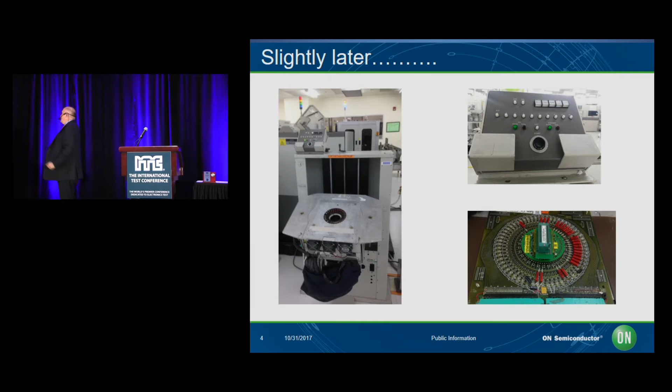And there was a little box like that that had two green lights: functional test, DC test. And your primary goal, or frankly your only goal as a test engineer, was to get those two green lights to come on. And so, once you got those green lights, the parts went away. And I think that in today's world, once you get those green lights, that's when the real analysis of what happened in that test and what you can do with that data begins. And so while we had sort of the dark ages there, we have a real opportunity now going forward.

But there are a lot of challenges that face test development engineers and test engineers today. We didn't imagine then the responsibility of developing a part and testing it and certifying it good for something like autonomous driving. A vehicle that was going to drive us, the closest possible thing maybe then was the moon launch rockets, where you could test one part for 6 weeks and make sure it was suitable for the purpose, unlike today where you have to test a billion parts a week and make sure that they're at that quality level.

Functional safety. Vehicles or other machines around us are going to make decisions on personal and human safety. It has to be validated. Digital medicine. A lot of the products that we build today are either implantable or in products that are helping people make decisions about their health. Again, those decisions are happening at a high enough value and a high enough volume level that we can't do the things that we used to do, which were really convenient, just test, maybe burn-in and some other things. And then what I call digital dependency.

Even the products that we used to consider consumer electronics, I can tell you people don't consider that anymore in their world. If your cell phone isn't working and you're using it as your GPS, or in any number of other areas. There have been studies where people's blood pressure actually goes up if their cell phone runs out of battery. And we're dependent on these electronic items nowadays. Even if they're products where we used to consider that a 300 or 400 ppm type of problem would be okay, it's not okay anymore because it's the world that we live in. We depend on these things.

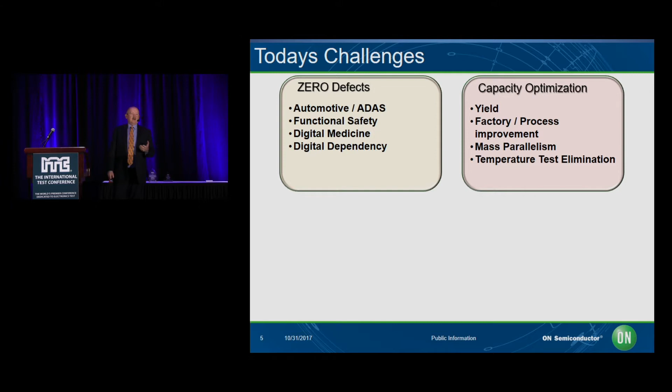I think we've sort of used temperature testing as, I won't say a crutch, but a bit of a crutch in validating how we do products. And I believe we have the information to eliminate that in a lot of cases today.

Design methodology validation, I think that we've been doing that for a long time. Some of the papers that I saw were on this, but closing the loop between our simulation and device models, getting them back into the actual data that we're taking from our testers, figure of merit optimization for our products, and being able to make decisions on how we want to specify the products based upon the actual output and the data, whether or not they're going to be suitable for the purpose that we want them to be.

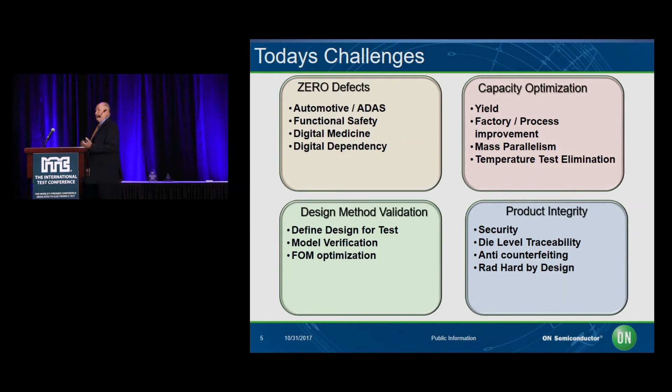And then product integrity. And product integrity, I think, is very different than zero defects, because this means that the product is the product. There's a lot of work going on right now in security and being able to make sure that the products are secure and unhackable. I saw that there's some papers on that this week. I think a big piece of that can happen in the test community, while we have those devices under test. Die-level traceability is giving us the opportunity to really understand the data that we have.

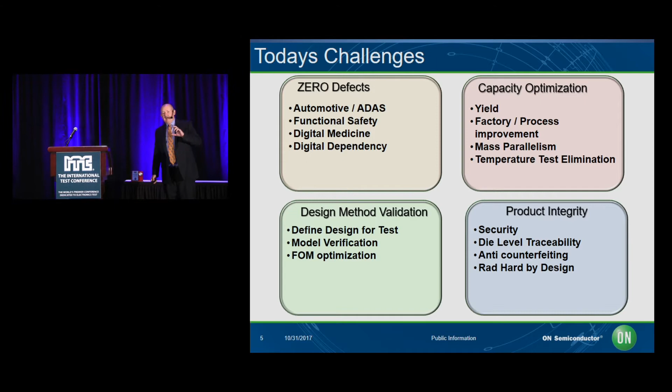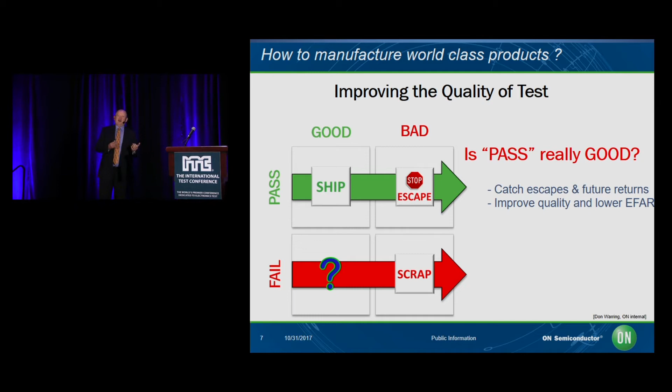So we've got good parts, bad parts. Is a pass really good? Sometimes that's a question. Is the one that fails really bad? One of the examples of this from my very earliest days is we had done an analog ASIC, a custom part that was going into typewriters. And we could not mimic whatever noise situation was being created in the typewriter in the ATE environment. We tested and tested, and after months of work, we still got parts that didn't work in the typewriter that worked on the ATE.

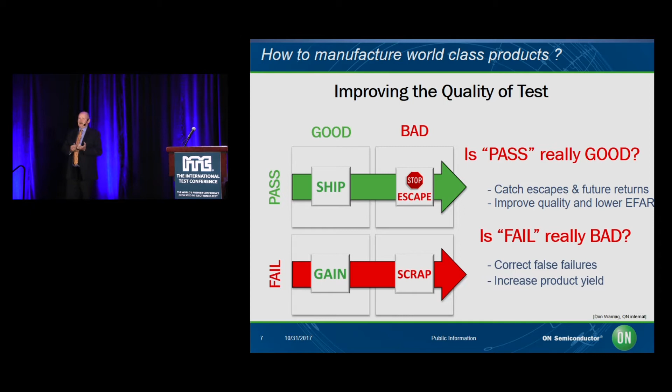And we literally had a person sitting in front of a typewriter with a ZIF socket and a handler, and she would push good or bad after she typed 2 words. We can't do that in today's environment with the volumes in the products that we have. And the other thing is, are we throwing away a lot of parts that are suitable for the purpose, and is that creating yield problems?

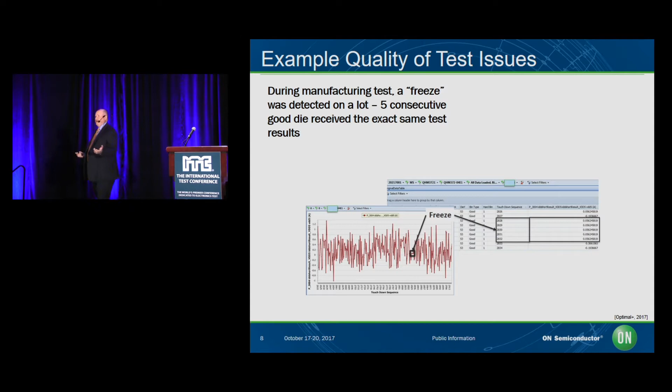But what about big data and being able to make decisions on data beyond setting up simple rules as we evaluate our products? There's a lot of discussion about all the things that we can do with the cloud and all the information that can be stored and gathered, and the amount of data being taken all the time now. My understanding is that on one of the new jet turbine engines, there's about 1 terabyte of data taken every 20 minutes. Well, that's great, but what happens to 1 terabyte of data every 20 minutes in operation?

Are we really evaluating that data, making the kind of decisions on it? The information is all there. Are we really looking at all of the information? And we have the same thing in our world in test. We've got information from the fab. We've got information from the device under test.

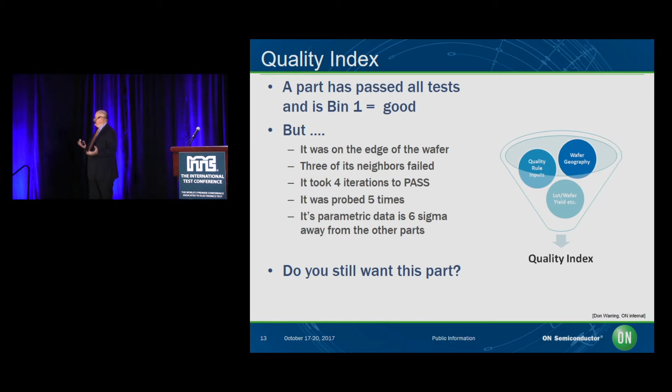So what's the quality index of a part? Is a good part the one where the lights come on green, right? Well, yes, sometimes, but we got it. But was it on the edge of a wafer? Is that the part that we really want? How were the parts around it? Was it a good guy in a bad neighborhood? Has it been probed multiple times? Did it take 2 or 3 insertions to pass? What do we know about the part, and how good is good?

Good guy in a bad neighborhood. Maybe you do or don't want to eat that strawberry. There's a strawberry in there. It doesn't have any problems at all, but if you look at the strawberries around it, you might think, this might not be one that I want to eat or that I want to feed to my children.

And yet we have that situation sometimes on a wafer as we're doing probe. We'll sit there and there'll be 4 or 5 bad die and a good die in the middle. You can see a couple of examples on there where you say, gee, is that really a die that I want to send to my customer? Is there something that's going on this wafer in particular, something that happened here that I should know more about?

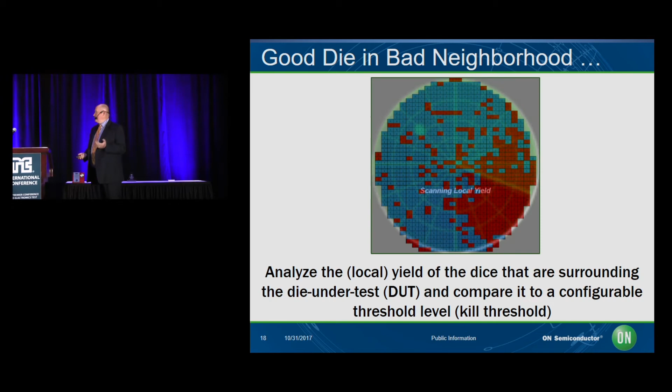Well, one of the things that we look at is, okay, how do we decide whether we've got a bad neighborhood? But again, all of this analysis is post-processed. After the bad guys have been inked, you go back and you can step across each of the die and you can say, how good is this die and how good are the die that are around this die? And this is all, again, just mathematical post-processing. You can go in and you'll get a different index or a different wellness factor for the die based upon the die that are around it.

And here you probably can't read those from where you are, but there are a bunch of small sub-1 numbers for any of the die that could possibly be around a bad neighborhood based upon something that we call a kill threshold. And that says, what die do I not want to give to my customer, or do I not think is suitable for this purpose? And it's a pretty simple equation. There's die area and the sensitivity factor.

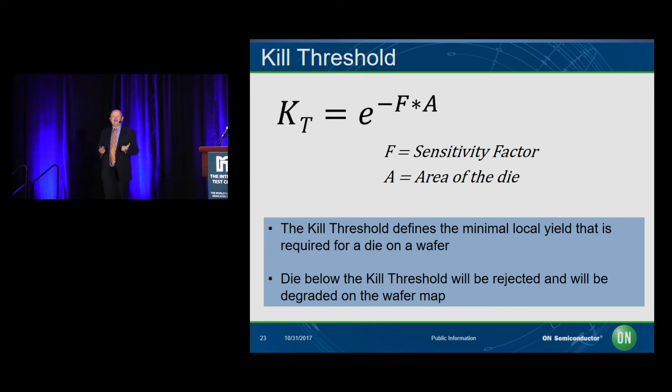And the question about a sensitivity factor is, how sensitive are you to having a part that is in a bad neighborhood? So here we say, okay, there's a sensitivity factor of 10. This would cause us to ink out or to post-ink out those 5 or 6 red die or yellow die that are there in the heart of the bad neighborhood. And again, this was an example that we built. In reality, this whole wafer would likely be thrown away because of that yield pattern. But it was a really good demonstrator for what the power of this tool is.

If you move the sensitivity down to a 9 in that formula, you can see now we've got about a 1% dropout. We throw away a few more yellow die there. You can move down again. Now we're a little over a 1% dropout. But as you continue to decrease this sensitivity factor, you step across, you begin to throw away a few more. Now we're up to 13% die. Do we think that that's gotten all the bad ones? We can continue all the way till there are only a handful of good die, depending upon that factor that we put in there for that kill ratio.

This may be important, and it may not be a decision that you make right now. This may be a decision based upon e-test information, mechanical information that's come out of the fab. There are a number of other things that may help you set this sensitivity level. Maybe what are we going to put this in? Are we going to put this in the guidance system of the new A350 or the flight controller, or are we going to put this into a power bank that people are going to give away as a gift at the show?

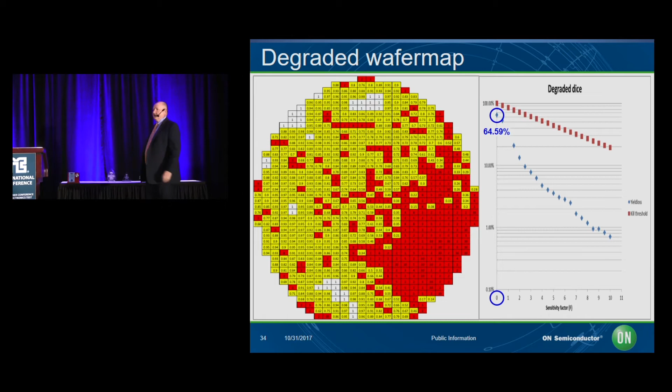And so I think there's a lot of data, but this is all post-processing. So this can be made based upon other big data that you pull into the system. Like I say, how close was this to the edge of the e-test data? How many times did we have to go through temperature in order to do this? And so you can sort of set that factor later and then continue to ink out any die that don't

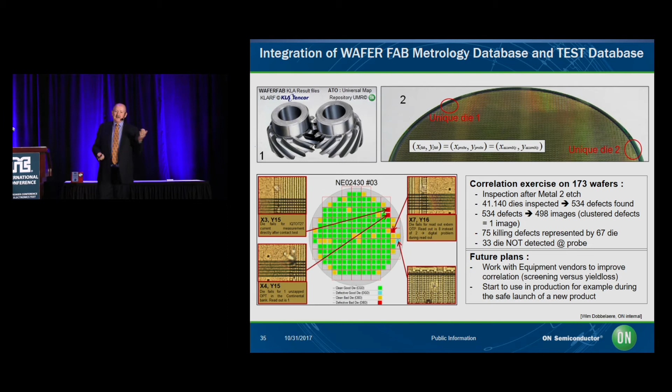work. Another opportunity is to take a look at the actual physical buildup of the wafer in the fab and some of the metrology databases that are out there, and compare them with your probe data afterwards. In this metrology database today, it's almost impossible. If you look at where the gaps are here, we need more help from the EDA guys. We need more help from some of the machine tool guys so that we can pull these databases together and get a better view on this.

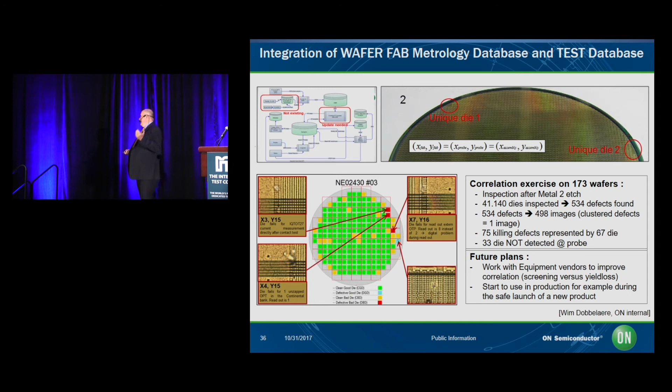If you look at the data here, this was just a test case that we did, but out of 41,000 parts, there were 530 defects found. But there were 33 die that were not detected at probe that had a visual defect that we probably don't want to ship to our customer. And those 33 die, those are the ones that get us. Those are the ones where the customer has a vehicle that doesn't start, or in a worst case scenario, you have to have an explant of a medical device that's implanted into somebody after a long time.

So we really need to continue to work together so that these databases can be better correlated. See, right there's the fab inline inspection database, and then the wafer probe map. So it got most of them, but it didn't get all of them. If you look at the wafer probe, there's some there that showed up in the metrology database that had scratches on that didn't get flagged at probe, and they can slip through our systems.

But big data allows us to do all of this correlation and comparison post-tester, so it doesn't slow down anything that we're doing on the test. But we do need some more help from the different EDA tool people in multiple disciplines so that we can get these databases to talk to one another.

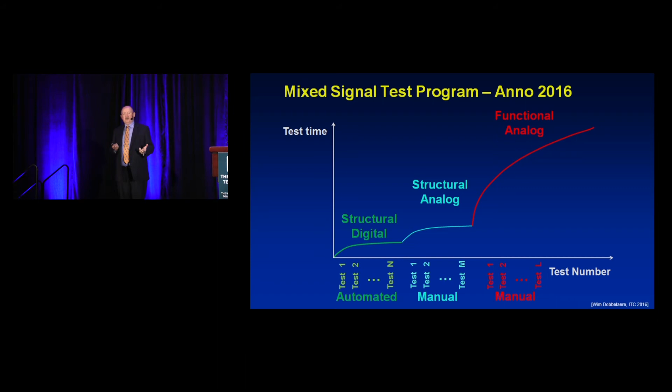that equation. But how do we get the mixed signal and the analog test to look more like the digital test? Structural digital is really well understood, and we've got great tools for it. We can do fault grading. We can go back, and the analysis of what we find is extremely easy to correlate back. There are structural analog tests, but the vast majority of our analog tests still today is what we call functional analog tests, where we're just adding test after test after test to validate something that either our customer has said they're concerned about or something that we've found that we feel like we need to do to validate that particular

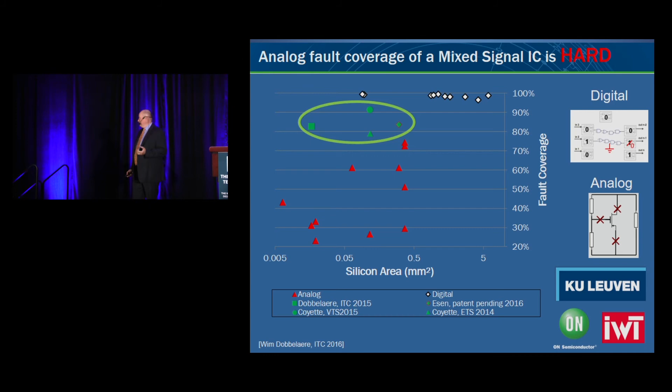product. So again, along the top line there, you can see we got 100% fault coverage or very close to it on all the digital tests. We do have some analog tests with very high fault coverage, and then we had some analog tests that have struggled with fault coverage. And so one of the concerns that we have is how do we get those two sets of data to overlap a little better and look a little bit closer to one another. One of the things that we've done for a while now is dynamic part average testing.

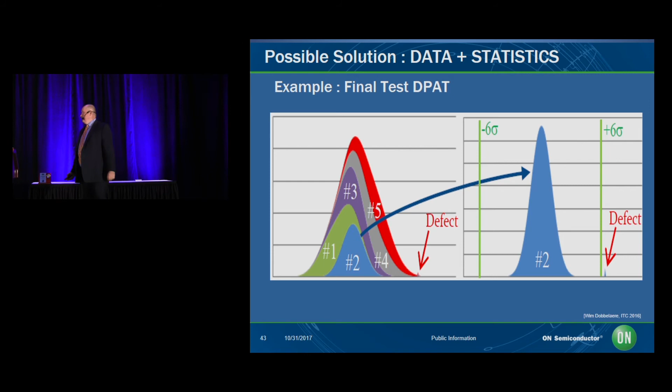So we'll go out there and crank in the spec limits at probe based upon, again, the entire population of product, either on that wafer or the entire population of product in that lot of wafers, or maybe even based on the last 30 runs of that product that have come out of the fab. We can take a look at that data, we can slide the curves in, and we can say, okay, here's an outlier. We're going to take that out of the equation. That's going to help us find a defect that we wouldn't have found before.

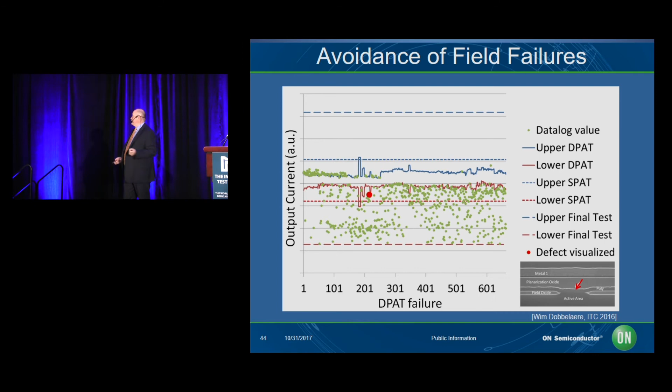And this is a little bit what it looks like. You can see the final test limits are the far outside. There's static part average testing, and then the dynamic part average testing that varies back and forth. And if this was solving all of our problems, then we could stop the presentation right now.

Now, there's a lot of different things that you could do at that point, right? You could say, well, maybe we could use temperature testing, maybe we could do a voltage stress, maybe we could come up with more and more things that would add to that time and those additional tests that we're putting in the functional testing to try and weed that guy out. But another solution is to take a look at the data that we've already got.

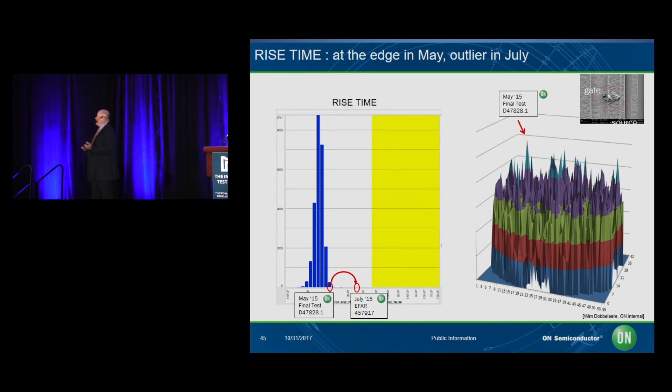So this guy earlier was just looking at the rise time on a certain set of pulses. When we took the rise time minus the fall time, guess what? It already showed us that peak. The data that we had already taken was telling us there was something different about that part in the distribution. When we took the rise time minus the fall time and set up a new set of dynamic part average testing based upon that set of conditions, the part would have been bad from the very beginning, and then it got worse. And you can see the spike in the data set.

Those types of relationships between tests where we're doing dynamic testing are, I think, the opportunity that we have with big data, because we should be able to crunch hundreds of variables. And again, this is all offline. This isn't on our test floor. It's not taking up UPHs and continuing to drive cost into our test. It's just giving us opportunities to find things that were already there, that we've already got the data that tells us we've got a bad part. We just haven't looked at the data in the right way yet. And I think there's a lot of opportunities.

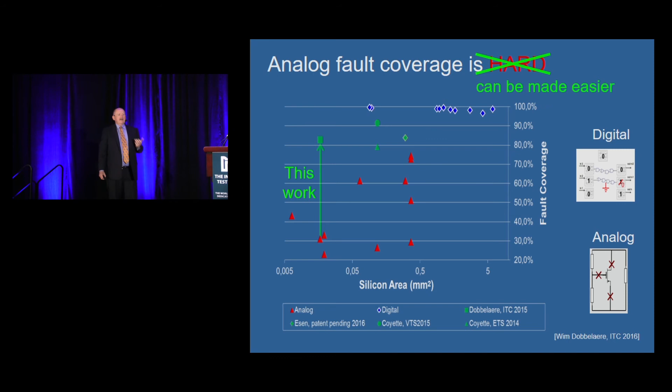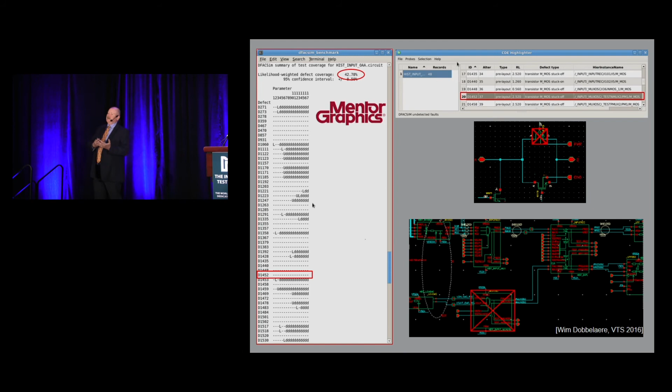So with that kind of work, we can move some of this fault grading up, and we can make it much easier. It's still not automated. I think that there's some opportunities for some automation, and certainly we've worked with some of our EDA partners, Mentor, helping us do this defect identification. They've been a great partner in that, and we've worked with them and others on the opportunities to see some of these defects. But again, closing the loop and getting that back into more of an automated, more of a real-time solution with the test hardware, still some work to do there.

But if we can do that, it gives us an opportunity to get the analog structural testing to look more like the digital structural testing. And we can push that out. Those are usually products that take less and less time. We can eliminate redundant tests, and we can create a better use product at the end of the day. Increase our structured analog testing, and bring down some of the functional testing.

I don't think we'll get away from it. I think there are things that either customers or use cases are going to deem that we still have to do some functional testing. But the more of it that we can reduce and the more of it we can put into a structured system and look at data that we already have, the better our end product is going to be. So how do we propagate this kind of learning through some more of the value chain?

There are a number of things, and you've probably seen Optimal Plus on here a couple of times. Certainly another group that we've been able to work with and help us do this. But there's data in a number of different parts of our process, whether it's in the front-end fabs, whether it's in our test solutions, whether it's in our visual inspections,

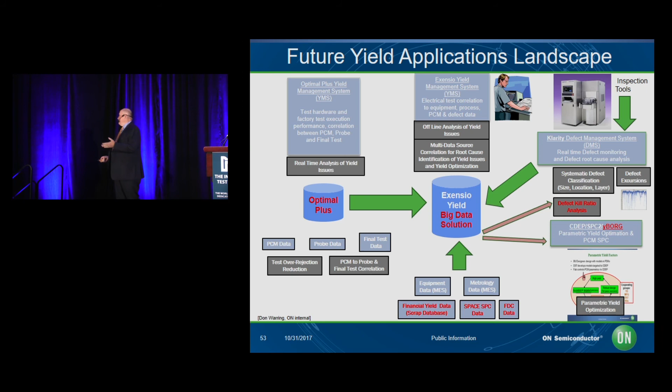and being able to pull all of this data together and at the end of the day get a quality index for this product so that we could say, well, look, based on the probe data, based upon the fab information, we should be very cautious about this wafer, or this is a great wafer. It represents the population of products that we have, and we can use very simple data post-processing going forward. But there are a lot of inputs.

The other thing is looking at the back end and test. And again, one of the things that we're as concerned about as getting the right parts and the highest reliability parts to our customers is being able to do it in the most economical fashion possible. This is just a set of inputs where we can pull data that gives us indications of UPH losses. So we're starting to lose UPH and act on that.

But again, you can see jam rate monitors, test OI controls, there's a whole host of things that we need to be pulling data down from, using that data to try and point us back to a root cause solution on something.

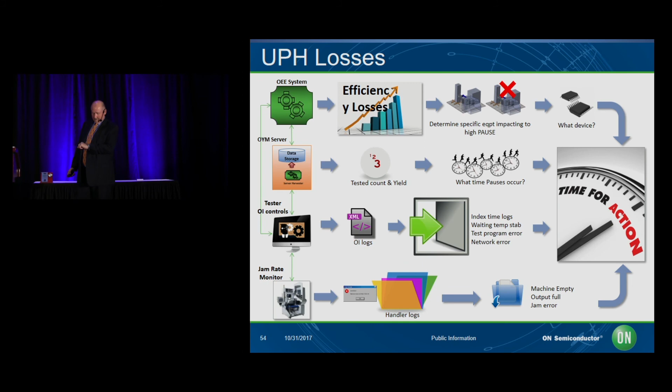So at the end of the day, what we really think is that the product should have a report card. Was it in a bad neighborhood? Was it statistically in line with what's going on? Is it a yield position where, even if there's a 40%, 50%, 60% yield on a product, if every other wafer is at 96%, that's a product that we really don't want in our population. It's a strawberry that I don't want to eat.

And I think that by using big data at a number of different input points in our process, we can get that scoring and we can get that learning. We talk about artificial intelligence, but it's really a two-edged sword. Because I think with our input to this, we've got the highest value today that we've ever had as test engineers. We own the data, and artificial intelligence doesn't exist without data. We're right at the front end of the data acquisition.

So I think there was that cartoon in the beginning that talked about the guy that was tasting the wine for the king. Where we're at today would be more like Robert Parker tasting the wine. And if Robert Parker tells somebody a wine is a 98, the value of that wine goes up significantly.